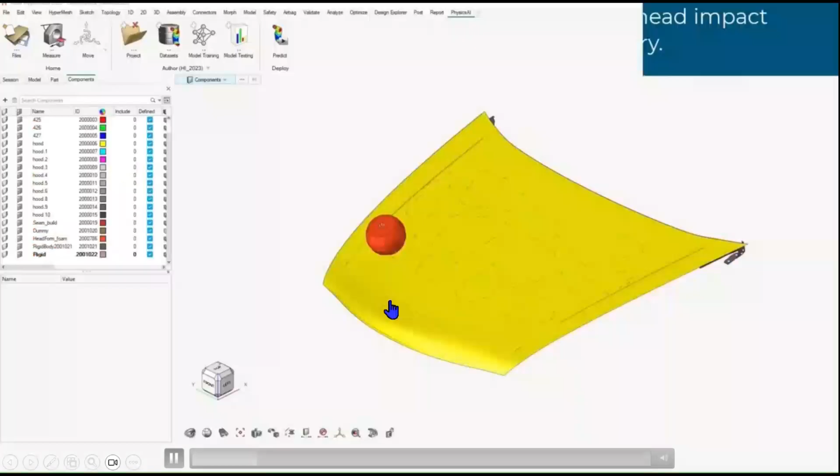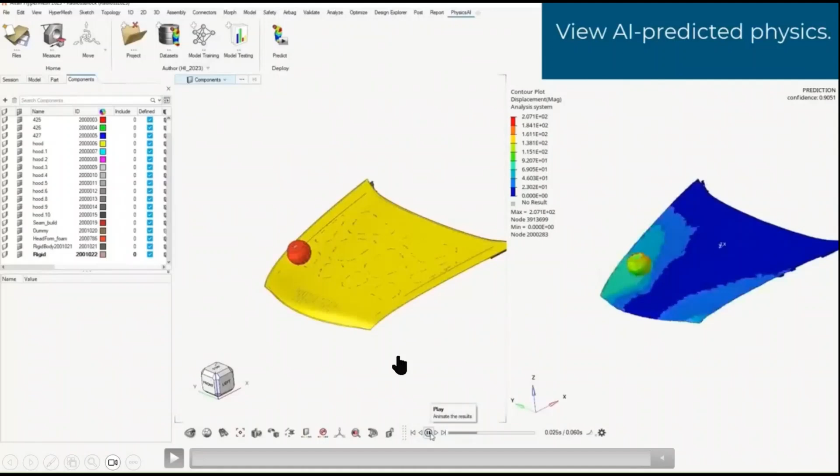For people who are already CAE engineers, FE is their day-to-day work, they can easily understand that this is just CAD, and going from CAD to the prediction, they understand how time consuming that process is. Starting from the meshing, maybe geometry cleanup, connecting, and all those things, you do one by one. Finally, when you trigger the run, you get to the second side of the screen, you get the results. Physics AI is able to do it with a single click and comparatively with much lesser time than what your traditional FE solvers are going to take.

So how it goes from screen one to screen two within just a click is what we are here for. We'll see what technology Physics AI is using and all.

Physics AI, by the way, is not the only CAE plus AI product that we have. We have other things as well in our portfolio. For multi-disciplinary design exploration, you have HyperStudy. Then for design exploration, you have something called Design AI, which is usable in the cloud as well as in HyperMesh and Inspire. You have the Design Explorer which you can use on-prem.

Then we have another data analytics platform called RapidMiner, now called AI Studio, which is a low-code, no-code type of data science platform that uses parametric data to predict parameters. Then we have Shape AI, which is for geometry recognition. Then we have ROM AI, which is for system identification and basically reduced order modeling. And then finally, we have Physics AI as well, that we are here for.

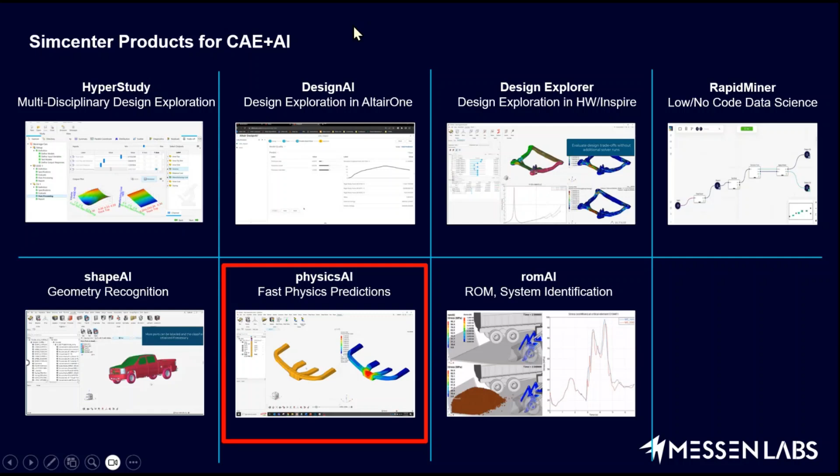So let's get started with the overview first of all.

How physics AI is different compared to other machine learning algorithms: let's say you use any general machine learning algorithm in the market. It will use structured data with explicit parameterization and variables with some values. When you feed that structured data to machine learning models, it will give you either a scalar prediction or a curve or vector prediction.

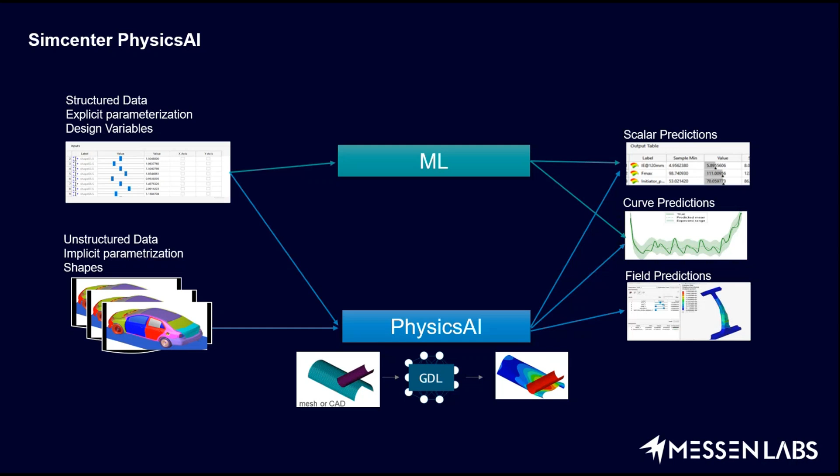What physics AI is capable of is you can either have structured data or contour result data, basically for the CAE engineers. So you can have unstructured data or structured data, feed it to physics AI, and it will give you field predictions as well as what conventionally any ML language can give you, that is your scalar and vector predictions. So that is where physics AI will be there for the CAE engineers as well.

What physics AI is able to do is basically because of something called GDL. GDL stands for geometric deep learning. So the main brain behind physics AI is geometric deep learning. It learns directly on whatever existing simulation data that you have with you. Many R&D centers or big organizations may have data that they have been using or that they simulated and got results out of.

Those existing data sitting in your directories can be made use of in physics AI by training the machine learning model and further making physics predictions on the new design that you get. The workflow is very intuitive for physics AI, not as complex as you see in other machine learning algorithms or workflows. It necessarily has some 4 or 5 dedicated steps that cover your whole physics AI workflow, and finally you will be able to do predictions on the new design.

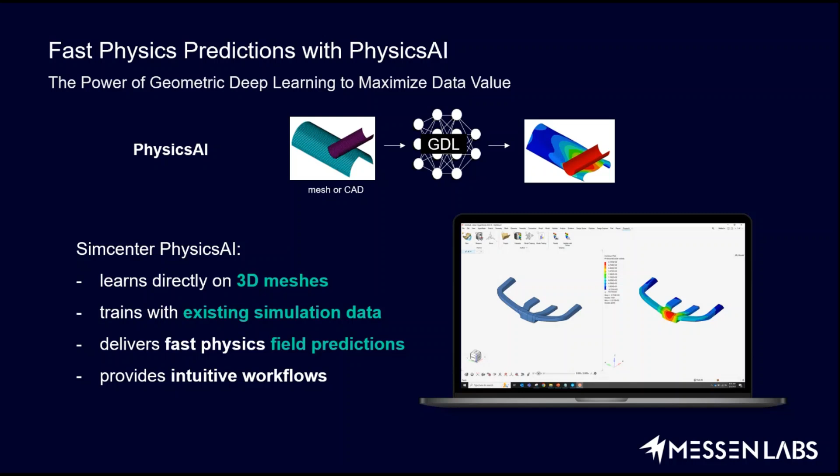So how is this 3D mesh being used? Let's say you have a CAD, and on that CAD you might have meshed it for a particular scenario. There might have been a time when you had a CAD, you meshed it, simulated it, and extracted results out of it. This is one scenario, but you can have thousands of such scenarios, which would yield thousands of result files corresponding to every design change or different geometry.

For each of the result files you have for every scenario, you would have nodes and features on that node. Features as in the position of each node, basically the X, Y, and Z coordinates, and how each node is connected to one another, and on each node what is your output. So on the result files you would have either stress data or displacement data on each and every node.

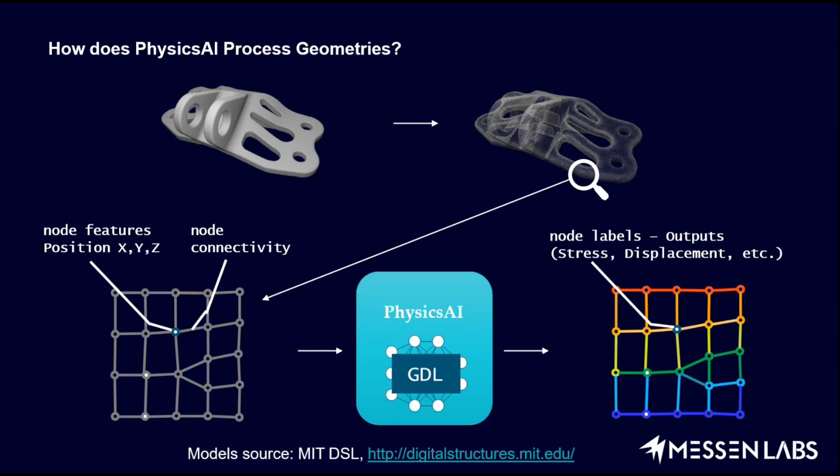When you feed all of this data to physics AI, it is going to look for patterns. It is going to look for how results are varying in each and every data set that you've provided. Based on that, when it learns, it will give you predictions on the new design with a new variation of geometry. So that is how physics relates to the nodes, the connections, the position, and the respective labels of the output.

What's basically used is something called an architecture. For machine learning there is an architecture used in the backend to train the models based on the different types of data that you provide. When physics AI was just launched, it had the very first simulator called GCNS, which stands for graph context neural simulator. Then came the transformer neural simulator. After that, the recent one was the shape encoding regressor, SER. All these algorithms differ from each other in one way or another.

Your GCNS, which is the legacy one, is based on graphs. It has the nodal coordinates extracted from the dataset and the outputs we saw, and it is faster on CPU if you have a CPU infrastructure with you. Then there is the TNS mechanism, which is based on the attention mechanism, and this one is faster on GPUs compared to GCNS. The prediction you do with a TNS-trained machine learning model provides a very smooth contour for the predicted data, as compared to GCNS.

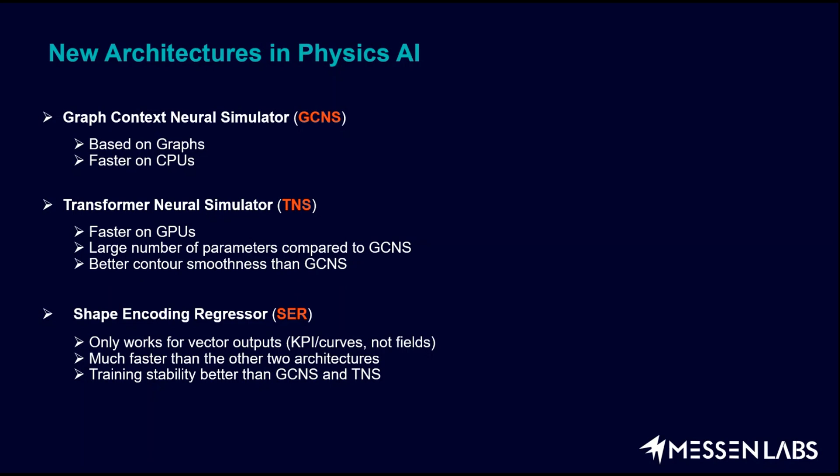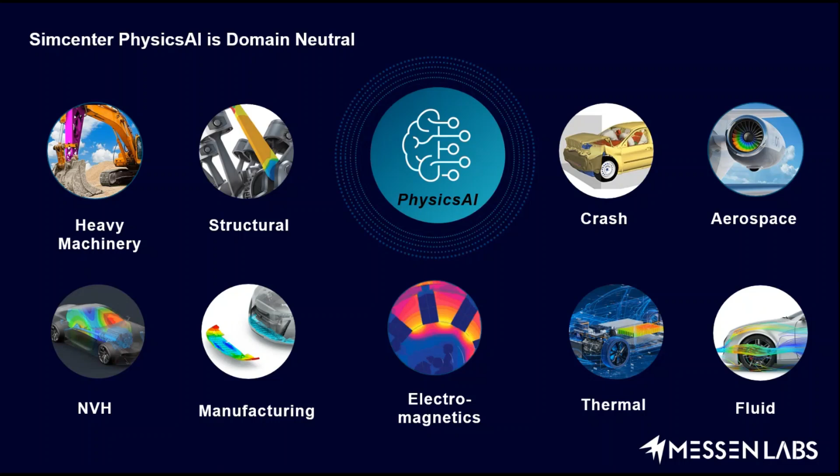The domains catered with Physics AI include structural, crash, aerospace, thermal, fluids, NVH, and majorly everything is covered here. One more thing to add is that you can use any result files from any solver, maybe Nastran, OptiStruct, or Radioss. The only condition is that the result files you have as a data set should be readable in HyperView. Even if it's not readable, you can use HV-Trans, a tool that translates your result files into the OptiStruct .h3d format. You can convert the result file and then train your Physics AI model.

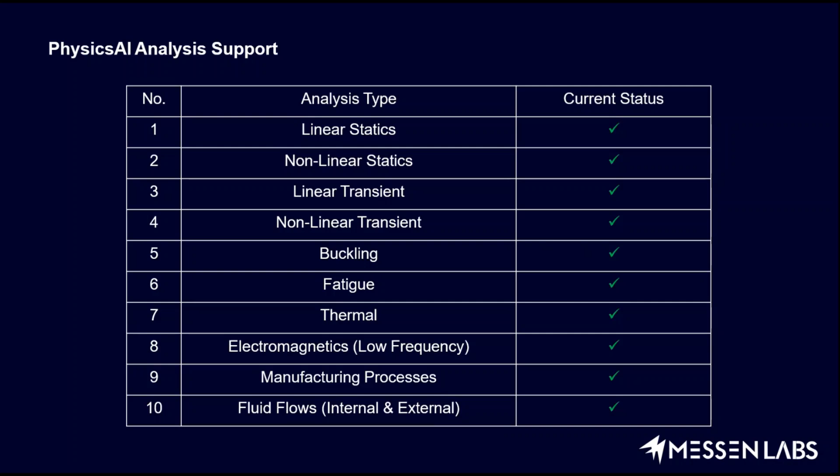The analyses currently supported are linear, nonlinear, transient, and statics, then buckling, fatigue, thermal, electromagnetics, manufacturing processes, and of course fluid flows.

How Physics AI helps accelerate your design iterations: in a traditional process, you first set requirements, then go with concept design. Once concept design is there, you explore, optimize, validate, and then the final design comes. But in this full traditional process, there's an iterative cycle of exploration, optimization, and validation. It's very iterative and consumes a lot of your time, isn't it?

With Physics AI, when you leverage it, you just set your requirements, add your existing data, the result data, and then train your model and get some inference from it. Once you get inference, you validate it with high fidelity simulation, and once validated, your final design is here. So the iterative cycle in the traditional process is eliminated with Physics AI. And when you get more data, you can add that as well. We'll talk about how you can add new data into the training.

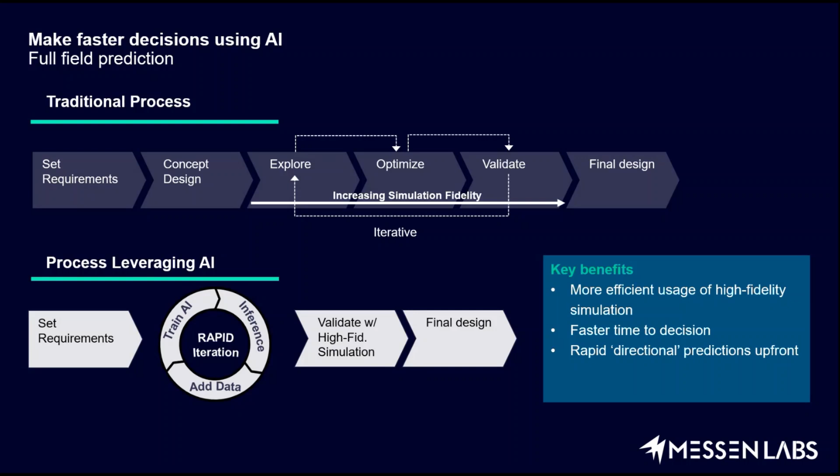Let's say after training your model, you get one new design that you think you can add into the existing trained machine learning model. At that time, you make use of the transfer learning option. You add that new sixth design into your training data set and retrain your model. Once retrained on the further data, you'll have improved accuracy, and your predictions will be much more accurate compared to when trained with just the first five data sets. So you can do that as well.

It's not like you just train it once and only utilize that pre-trained model. You can add further data as you get it from further simulations.

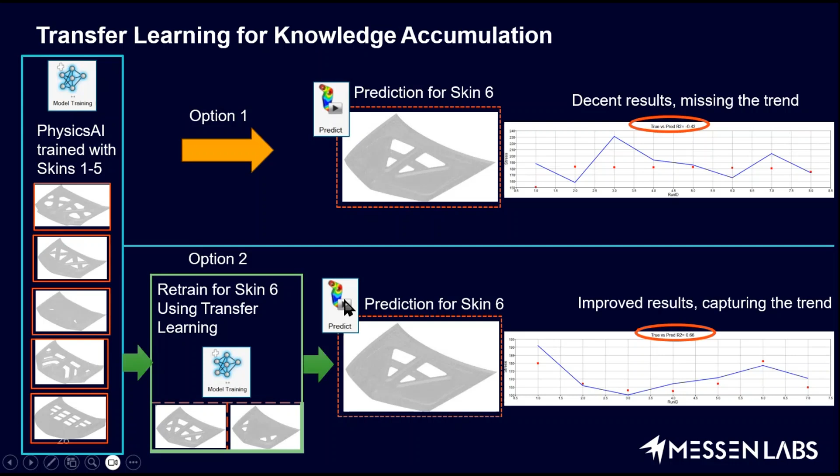That was the overview. Let's see how the general workflow goes, from data to deployment. First, you have the data. You collect historical data, or if you don't have data, you can generate synthetic data using HyperStudy and Design Explorer. You generate that synthetic data, then prepare the data by cleaning, pre-processing, and splitting it into training and testing data sets. Once the data is prepared, you go with model training.

In the model training, you generate the Physics AI model. The very first training should be on the already existing default parameters it has. Once you get the result, you can optimize the hyperparameters, fine-tuning your model parameters for better performance. So the accuracy can be further increased once you get the preliminary ML model accuracy.

Once you optimize your hyperparameters, you go with model testing. Whatever data you kept for testing, you use that to test the accuracy of your machine learning trained model. Finally, once you're satisfied with the accuracy results and metrics, you can go with model deployment.

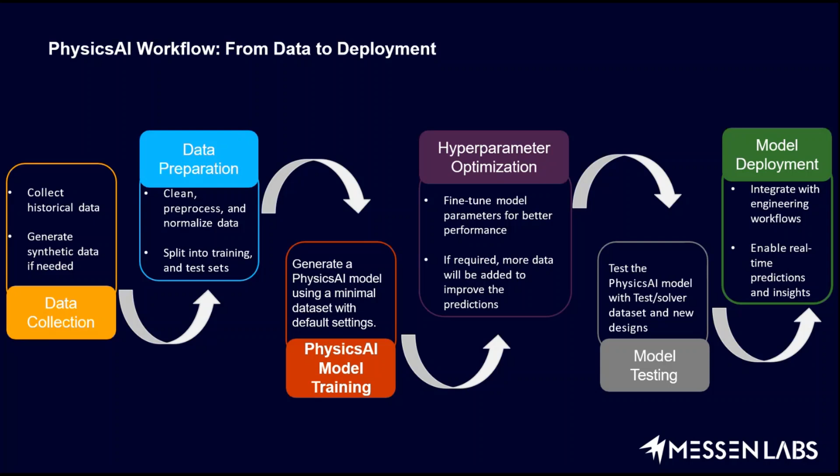And when you pull in this data to train a physics AI model, it will generalize the model and the patterns that it sees in the data set. So next time when you want to see the results for a new head impactor location that isn't already in the data set, you just feed it in and make the prediction like we saw in the very first slide, if you recall.

That particular slide was telling you if you have any new CAD with a new impactor location, you can just make the predictions with one click. The necessary condition for that is you need to have the machine learning model already trained with you.

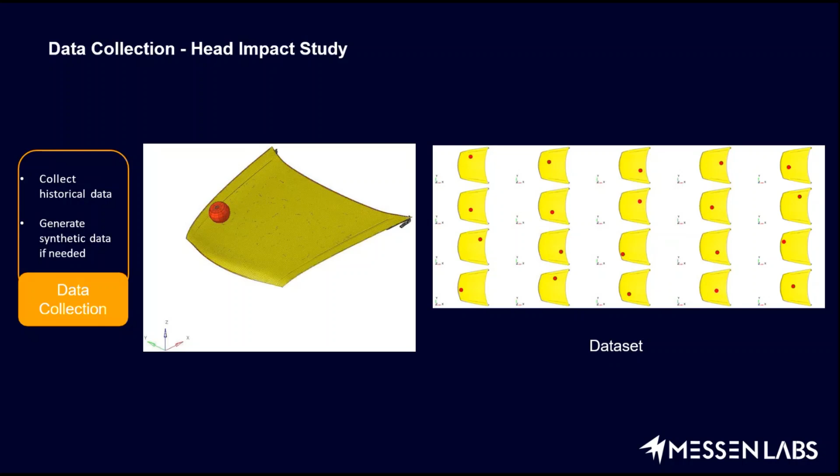The data set basically has a nomenclature. You have the training data set first of all, and then you have the testing data set. Within the training data set as well, you have further classification: first your training, and then the validation. Both of these, training and validation data sets, are going to be part of your training procedure itself.

So how is your training procedure going to be? First of all, you train the model on the training data set. Then the physics AI, without your intervention, will be able to evaluate the model during the training process on the validation data set. So when it is training, it is going to evaluate the model's accuracy on the validation data set that it has already extracted.

As it gets the predictions from the validation data set, it is further going to tweak the model according to whatever results it sees, and then it will again retrain the model. All this happens with multiple iterations during the training procedure. Finally, when the training procedure is done, it will choose the model that performs best on the validation data set, and that model will be taken into consideration for whatever predictions you make on your new designs. So that is how your training process is going to be.

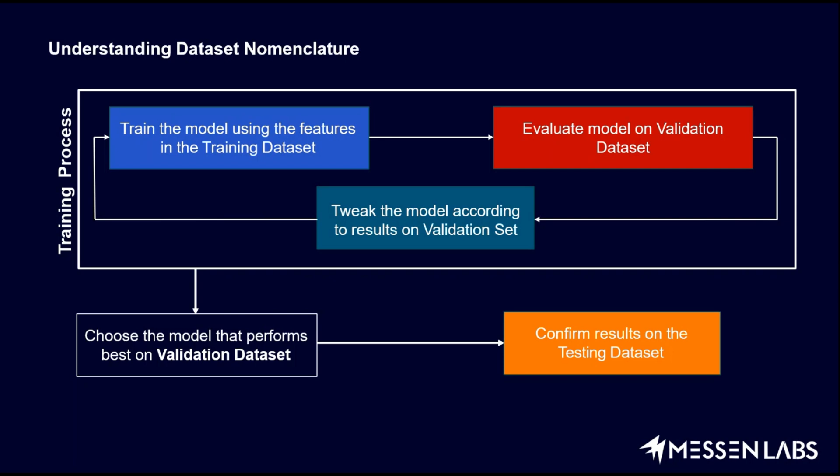So how is the accuracy of the model you're training determined? There are multiple hyperparameters that you are going to set when you train the model. As far as model complexity is concerned, there are two things: one is your depth and the other is your width. Then for the training process, you have the learning rate, the batch size, the epoch, and finally the early stopping or patience as well.

I'm not going to go into the details of it, but it is well enough written in the documentation, so you can go through each of that.

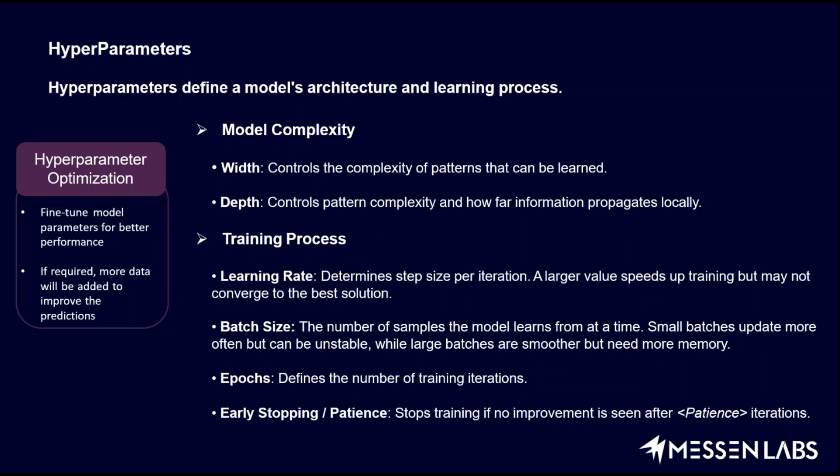As far as model complexity is concerned, let's talk about the width as well as the depth. You cannot increase the width or depth too high because it is ultimately going to lead to high resource costs, and it will also be computationally very expensive if, without any thought, you just increase the width and depth. If you have low depth and low width, it is going to be very resource friendly, but the training accuracy might get hindered. And if you have high width and high depth, it will again be very expensive computationally speaking.

So this particular image, don't get confused—this physics AI does not use images. It's just an analogy to tell you how the depth and width are varying. If you increase the width, it is going to capture more features. And if you increase the depth, it is going to capture more details. So this image itself speaks for it. I hope it is understood.

So let's see a general workflow of how physics AI is going to train the model, test the model, and finally predict.

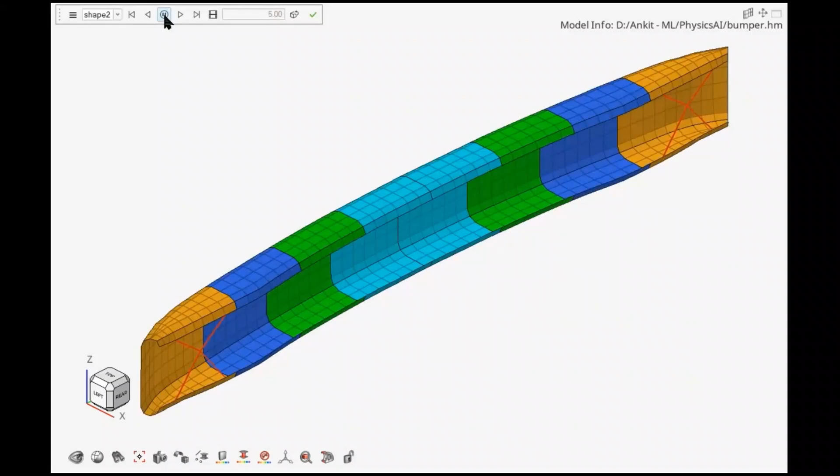So you have some design variations. This is synthetic data that is generated. The upper and lower flanges are having variation in the angle, and these have 19 data sets. So you specify a project name as well as the location where your project directory is going to be saved.

Then you go with the dataset creation, provide a dataset name, and point to the directory where all your data is going to be stored. Once you select the folder, all your data will be there. You can enable the train test split and then extract out the dataset.

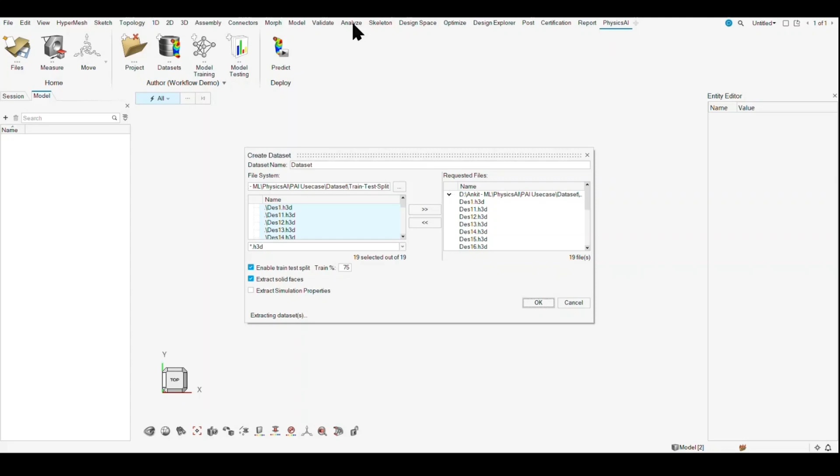Once a dataset is created, you go with the model training, specify the name for the model that is going to be trained, and then the input and the outputs. So input is going to be your mesh data as well as the part labels, and output is basically what you are going to predict.

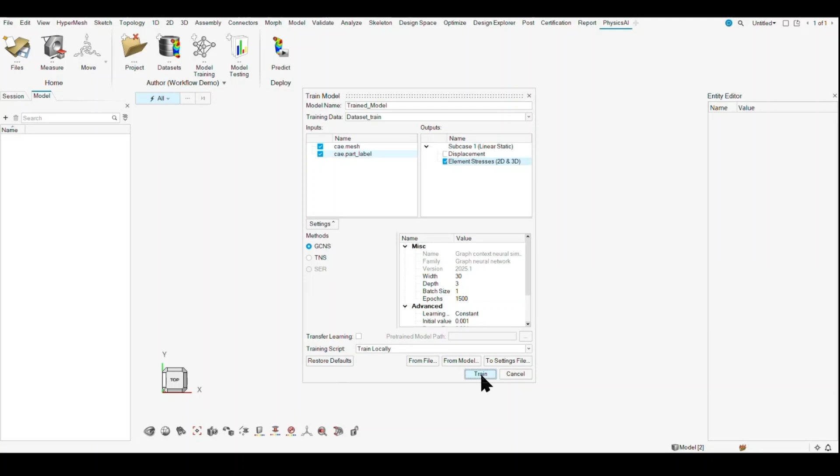Once the model gets trained, you can see the log, you can see the data for epochs and the loss for each and every epoch, and then there is the loss curve as well.

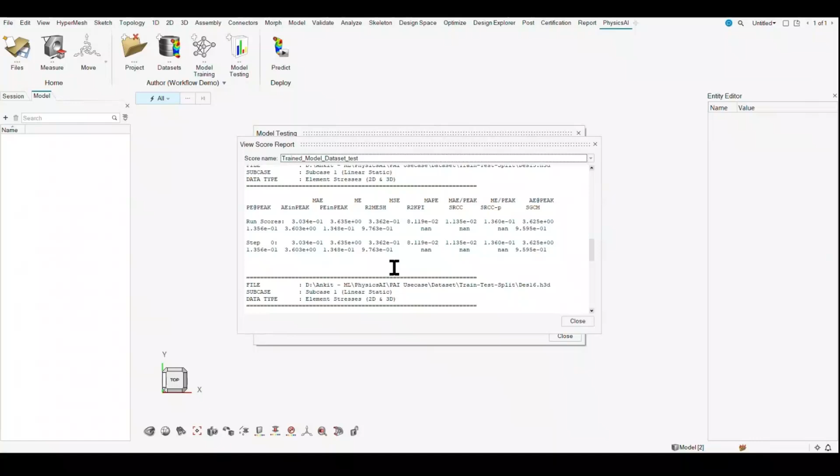Once your model is trained, you test your model on the testing dataset, and then finally, whatever the testing data you have, you can see the detailed report of how your trained model has performed on the testing data.

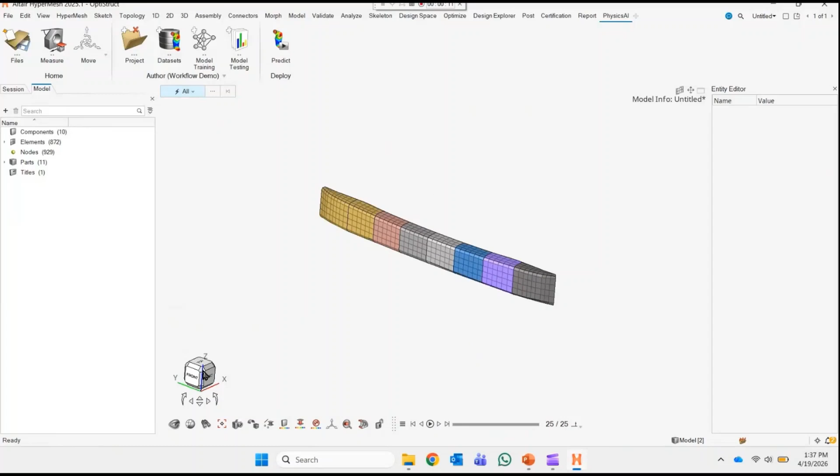After all this, you just set the model as active. Once the model is active, you can bring in your new data, new design basically, import that design, and then finally click on predict. So once you click on predict, it will take seconds to minutes maximum, and then you will have your results predicted onto the new design.

So that is how the workflow of Physics AI goes, starting from creating a directory till the end where you predict the results onto the new designs.

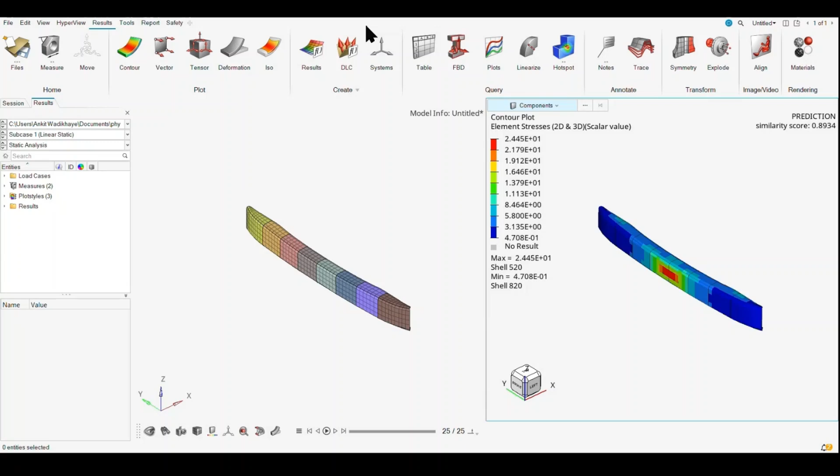Okay, let's talk about custom inputs and outputs. So Physics AI, as I said earlier, is not just limited to predicting the contours. It is more than that. You can predict the KPIs or the values as well as the curves. So that is where your custom input comes into picture.

Custom inputs are of two types: one is global, and the other one is nodal. So let's say you have some geometric variations, and with respect to all the data you provide for geometric variation, you have any input that is going to affect your final results. But make sure that whatever variations you bring into picture do not change the mesh. The mesh data should remain as it is. Only the inputs that are going to affect your final results can be changed.

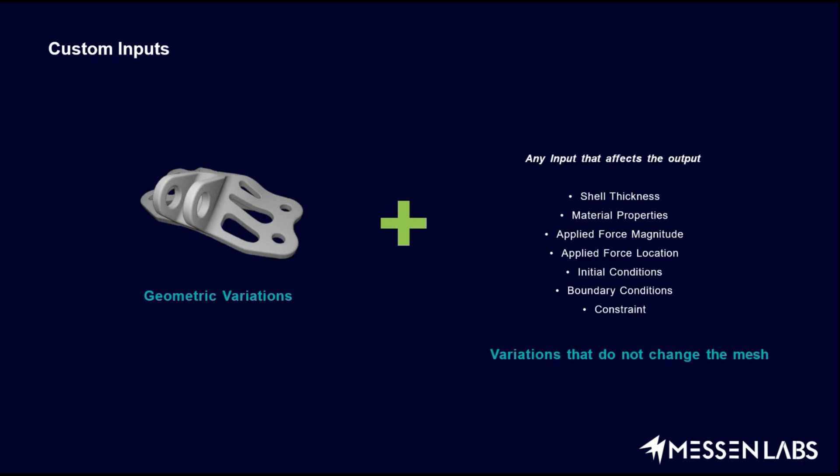So what are those kind of inputs? Those are, let's say, the shell thickness. Then there are material properties. Then there is force applied to a particular node across all the files. So you have force locations, the initial conditions, the boundary conditions, the constraints. All these can vary across all the files, and you can bring that into picture to train your machine learning model.

These custom inputs and outputs have further classification. One is the global input, and the other one is the nodal input. Global input is basically the inputs that are going to vary across all the nodes for each and every model. So let's say for three components, your shell thickness is varying across each file. That can be considered as a global input. Then material properties apply the same thing, and the initial condition as well.

The other thing is your nodal input. Nodal input is going to be the inputs that you provide for a particular node across all the dataset. For example, there is node number 100, and on node number 100 across all the dataset, you have the force magnitude differing. So you can make Physics AI take that into consideration.

So like that, you can have boundary condition variations, you can have constraint variations, you can have the locations of the forces that are varying, and all that can be brought into picture for better accuracy and making sure that Physics AI interprets the pattern for the results associated to these variations.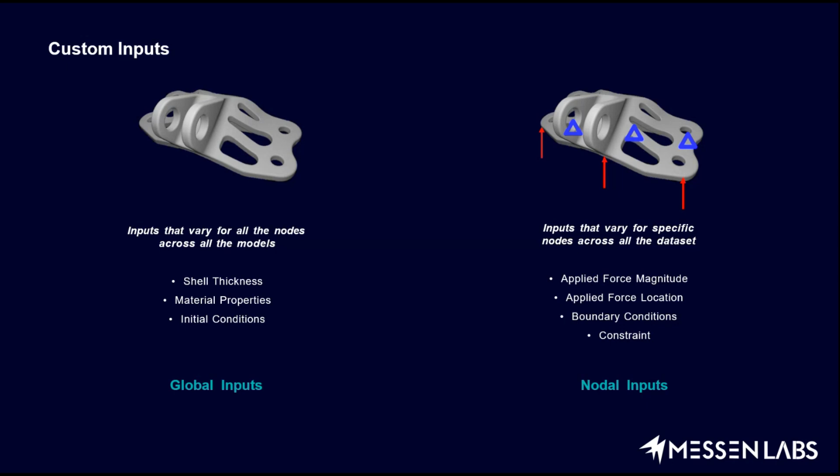So let's see how your custom inputs can be taken into consideration for training your model. Again, you first create a project, and then provide a location where all your projects are going to be saved.

Notice that in this, whatever training files are there, each and every training file has the same name convention with respect to the corresponding H3D result file that it has. For example, run one is having one H3D file as well as the JSON file. Likewise, run 7 is also having one H3D file and one JSON file. So let's see what the JSON file is carrying.

So each and every JSON file is carrying a label, a role, and a type. Role is basically input, but if you are going with custom outputs, you would set it as outputs. So for let's say E and nu, the Poisson's ratio and the Young's modulus, you are having a certain data value that is there for a particular result file. So if this is run 2 and you click on the JSON file related to run 3 or run 4, it will have a different E value. So you can feed that E value as well, in the form of the JSON file.

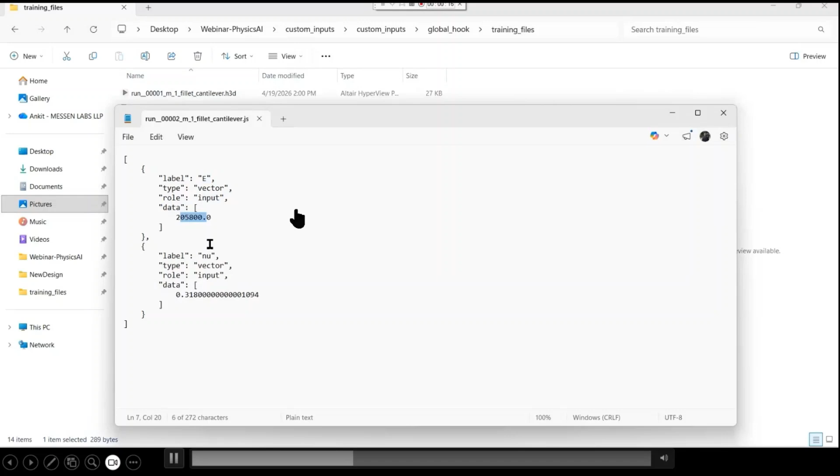So once you have all the JSON files corresponding to the result files, you can have a Python script. This Python script, you are going to paste into the hooks folder that it creates in your project directory. This is the name that we provided, the global hooks folder. And by default, these particular folders are getting created.

So that particular Python file, you just need to paste it into the hooks folder. Once you paste it in the hooks folder and go with the dataset extraction, you just point to the location where all your data is, select the folder, see the H3D files, and say OK.

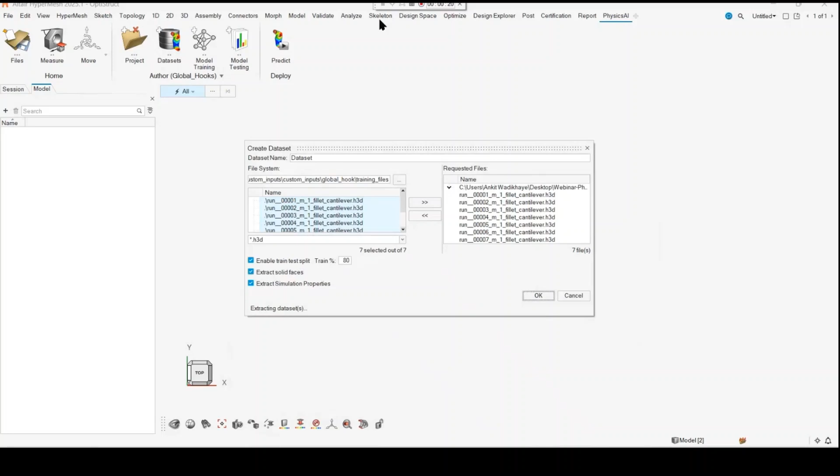So once you have the dataset, when you go for training and train a new model, you will automatically see that in the inputs, apart from the mesh data and the part label which are default, you will have further model data as well that you have specified in your JSON files. So we only specified the value of E and nu for each and every dataset, and those are populated here in the inputs. So you can make use of these also to set it up as inputs for physics AI to learn from them and see some patterns if these values are affecting your results.

So the result thing remains as it is. You just specify the name and specify hyperparameters and finally train your model. So when you go for prediction, the only thing you have to take care of is for the new file, you will be having a new value of E and nu, the Poisson's ratio and the Young's modulus. That JSON file should be pasted in your hooks folder. When you paste it in your hooks folder and bring in the new design, physics AI will consider the values that you have fed into the JSON files, and based on that, it will make the predictions on the new design. So that is about your global inputs.

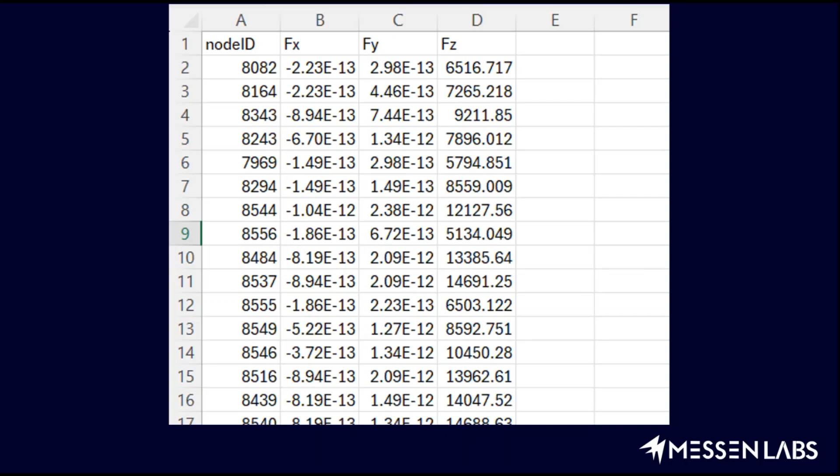So this was about the custom inputs. Let's talk about the custom outputs. So right now we were specifying the entities that are going to affect my results. What if I want to predict results that are not contours, but some key point indicators? Let's say the maximum value of displacement or a curve. So how you can predict those things, which are not native — using the custom outputs, you can specify those things as well and then get your result outputs. Let's see how that basically works.

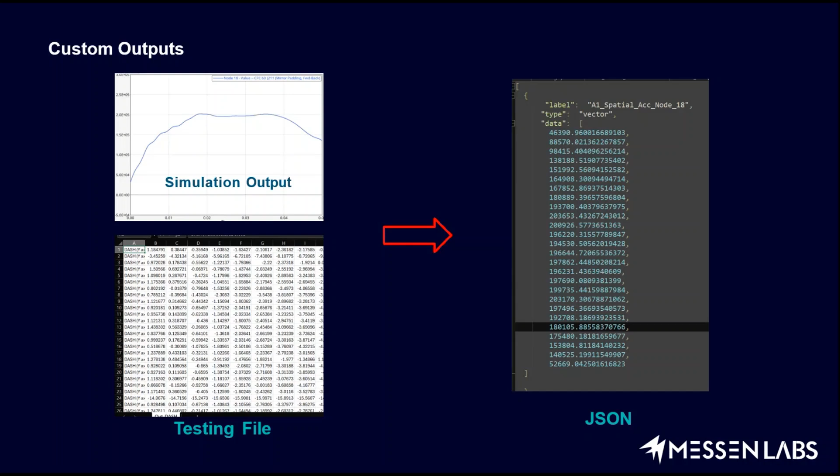So if you see here at the right side, you have a label and then a type called vector, and then the data that is associated to that particular file. If you see the left bottom side image, you will have on the A column all the result files, and for each and every result file, there is some value that is going to change for the B, C, D, E, and F column. So these testing files, you can make use of to predict the outputs that are related to the new designs. Let's see this in action.

So you specify a project name as well as a location.

So if you see, with respect to each and every H3D file, you again have a JSON file. And if you open this JSON file, this time you will see only one syntax change, that is the role. So right now, the role is set as output. If you set the role as output, it is going to predict the following data — for example, displacement I, displacement H, and then I1. These are the labels that you are interested to predict. And you set it as an output. So with respect to each and every H3D file, you already know what is the displacement I value, what is the displacement H value, what is the I1 value. You just set it up as JSON files with respect to each and every H3D file, and when you set it up, you use this as the custom outputs.

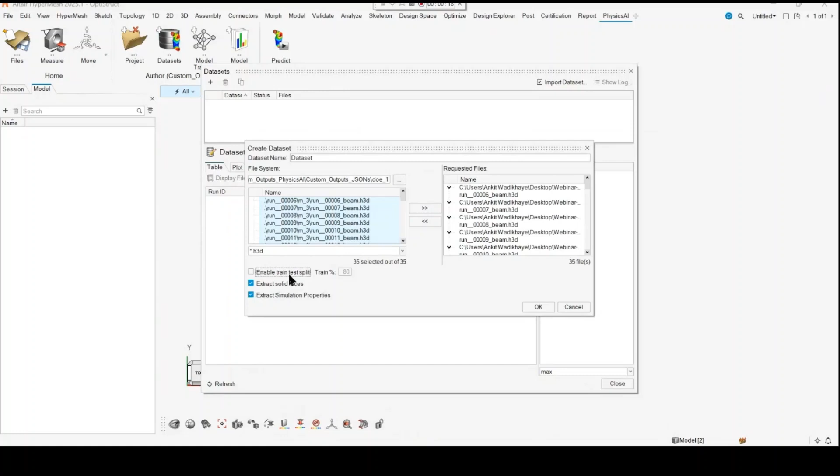To go for creation of the dataset, specify the dataset name, point to the directory where all your data is, and then request those files and extract the simulation properties as well as train test split.

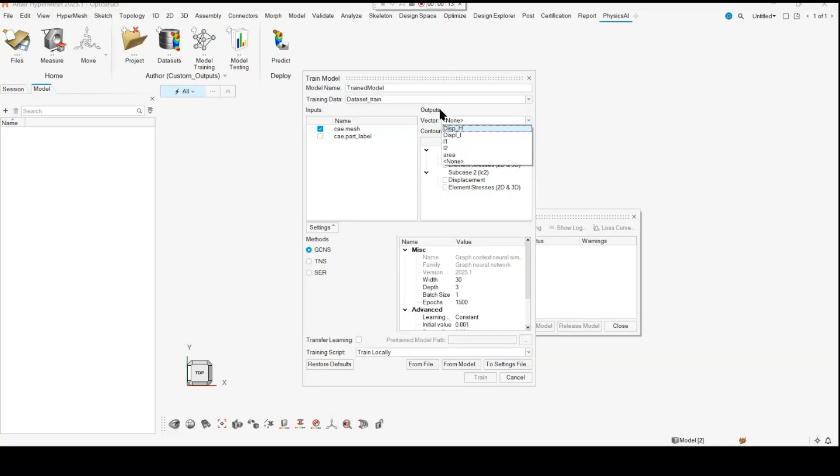Finally, when you go with model training, you will see one more option here, that is output for vectors. Here you have all the particular labels that you have set up in your JSON files. So basically, you are telling Physics AI that my input is going to be the mesh data, and based on that, I want to predict some particular vector data.

With this, you need not select any contour for output, just train your model. For prediction on the outputs, what you need to do is have a JSON file with the new values in the hooks folder. Those hooks folders, same as we did for global inputs, you will have to do for custom outputs as well. Hope the idea is clear.

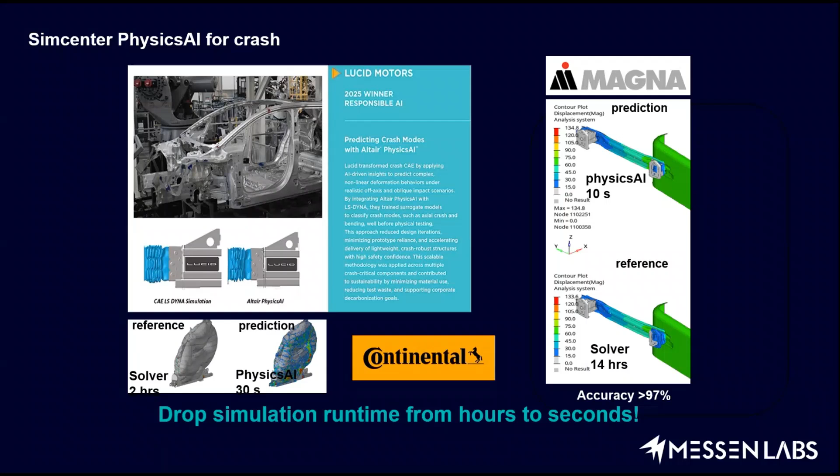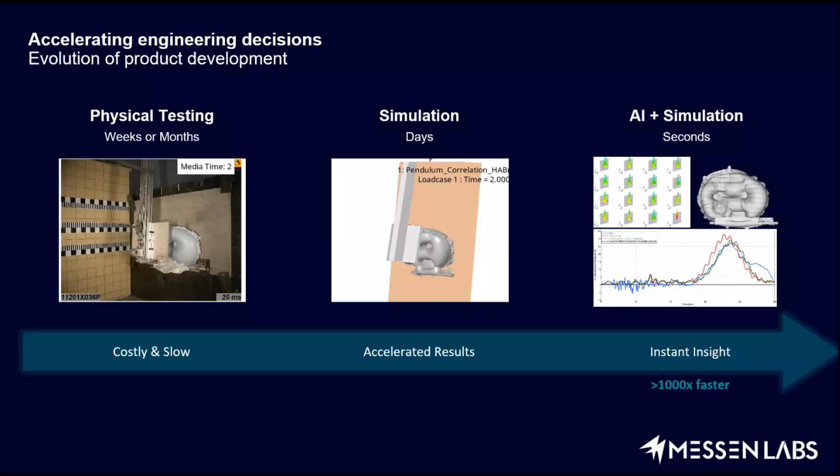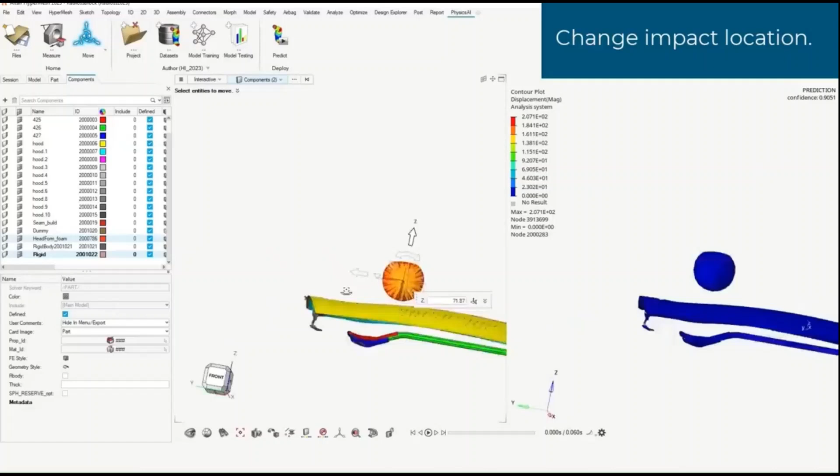If you remember the very first video that we saw in the first slide, this is the continuation of that. Let's say you want to see different iterations of the designs. What you can do is change this impactor location anywhere in this particular hood area, and then quickly click on predict, and it will give you the results. This is very intuitive. Within the Hypermesh UI, you can change certain parameters, certain geometric variation, and Physics AI will update its AI predicted results, which is going to be faster and accurate as well.